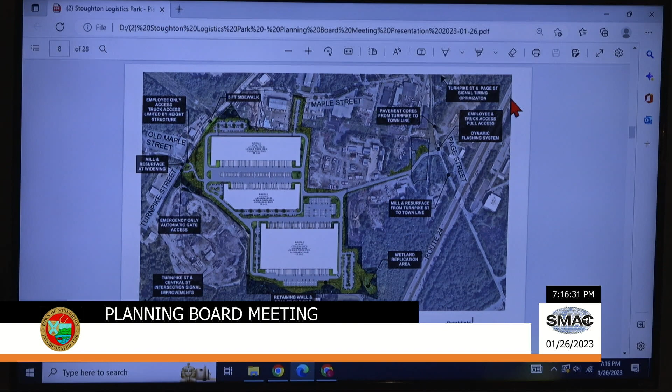This is our site plan, and we wanted to highlight some key areas as well as things that have changed since we were before you last. At the top of the page is Maple Street, Turnpike to your left, Page Street to your right, Route 24, and the IKEA site down to your south.

Starting at Turnpike Street to the left, we have our employee-only access, and the truck access is limited by a height structure. We're proposing to mill and resurface along Turnpike Street where we're widening, and also a 5-foot wide sidewalk that picks up where the current sidewalk ends, near the high voltage lines closer to Maple Street, continuing along our frontage on Turnpike Street and ending before the aggregate industry site.

In addition to the employee-only access, we have a separate emergency-only automatic gate access, which would be coordinated with emergency services to ensure they have access through the gate via fob or PIN code.

Then if we look towards the other side of the site on the Page Street side to your right, in terms of work that we've done in coordination with the traffic peer reviewer, as well as the town engineering department, we're going to touch on these in more detail a little bit later, but I'll give you a brief overview.

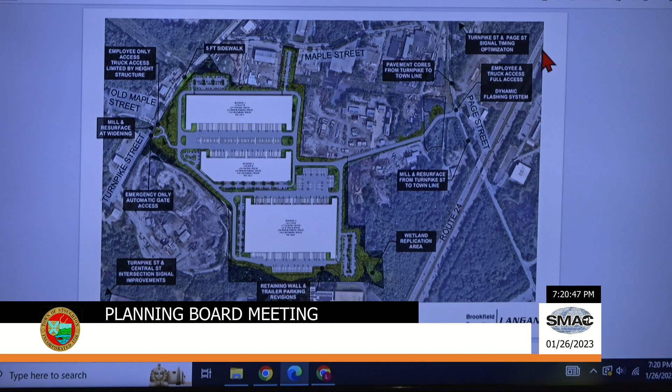Next slide. So there are a couple questions that came up at the last hearing when we were before you. One had to do with how much existing vegetation is on site, how much we're removing, and then how much are we proposing, because there is some clearing that we have to do on site in order to put in the development. So we took a closer look at that to provide the board with some numbers.

In terms of existing vegetation, we have on site around 11.6 acres, shown in the green shaded area. Areas where vegetation and trees are to be removed are shown in orange, around 4.8 acres. So 11.6 minus 4.8 leaves 6.8 acres of remaining existing vegetation. Layering in what we're proposing on site, where there's a quarry now with no vegetation, we're adding 11.7 acres. So 6.8 plus 11.7 gives a total vegetation for this site of 18.5 acres, a significant improvement compared to the existing vegetation out there. Our proposed vegetation will be native flowers and plants, also adding a considerable amount of trees.

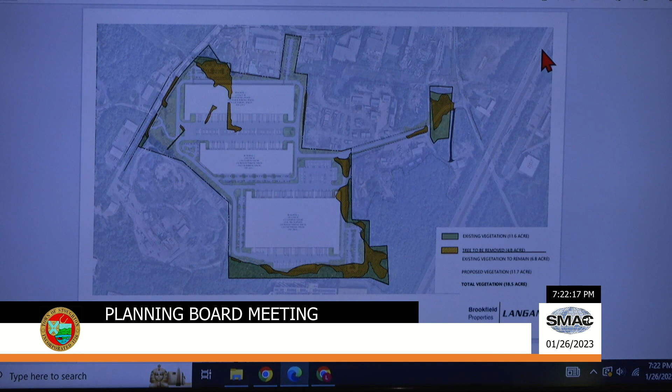Next slide. Sorry, Mr. Chair, through you, I think you have a question.

My question is, in your analysis of the existing vegetation and what you're proposing to install, have you done an analysis of broadleaf plants, large trees, maples, oaks, et cetera, versus conifers, which are native, and the net loss or gain of photosynthesis that your 18 acres will provide versus what exists now?

So we have not done any sort of greenhouse gas or photosynthesis analysis. We do have some inventory numbers in terms of deciduous versus conifers that we can look at and get back to you with more information on.

I think our goal is to certainly maintain and hopefully increase the photosynthesis, that's really the primary concern. Neither Hillary nor I can answer with specificity, but what I can tell you is that Sean and the others working on this are focused not just on quantity, but also quality, and one of the qualities is what kind of profile the particular selection of species has, and hopefully...

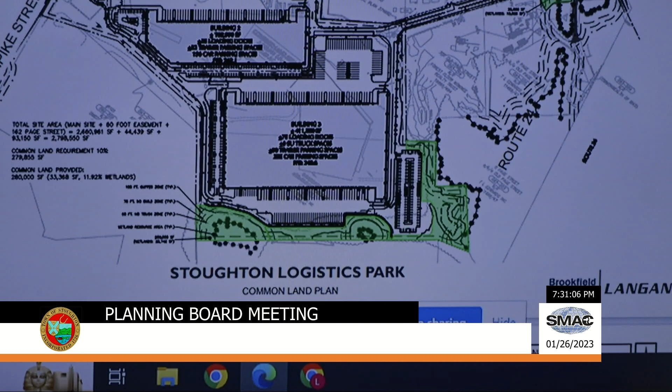Within the green space we're proposing to the south, we're really linking things. We have two isolated vegetated wetlands to the south, and we also have the wetland replication area to the southeast. Then to the east of our site, we have an existing bordering vegetated wetland.

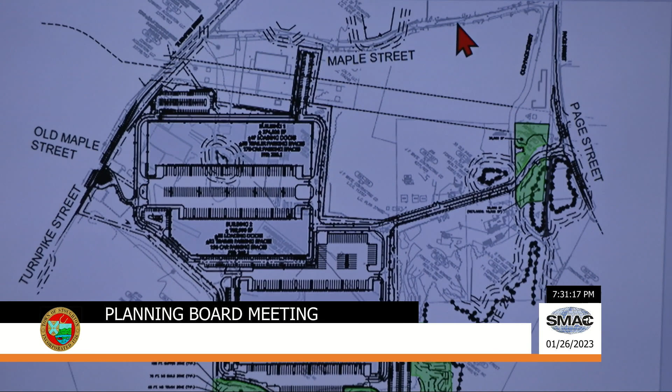So we're looking at taking that strip as common land to preserve it, which we think will be a nice conservation area, and also, speaking with the environmental affairs agent, provide nice habitat for amphibians and wildlife.

So this would be basically strictly conservation habitat land. But is it land you're looking to give to the town, or what's the long-term logistics of how that happens? Your bylaw allows a number of different things, and we're open.

I'm asking - I think our preference would be that we'd have an agreement with the town, but we'd continue to hold title. And the agreement would be? That we would maintain it in perpetuity. We would do it as a conservation restriction or other agreement with the town, whichever works for you. Right, correct? Yeah.

Go ahead. Okay, so I'm going to hand it off to Maximo, who will go over some of our traffic slides and some of the work we've been doing since we last met with you. Thanks, Hillary. Yeah, that's fine.

Good afternoon, Maximo Polanco with Langan Engineering, the traffic engineer who has been working on the development. Mike, if you can go to the next slide. So before we get into the slides, a brief update of what has happened since our last meeting.

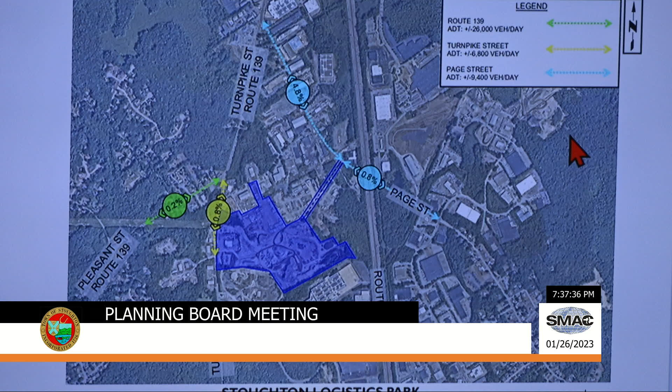If you can go to the next slide, Mark, please. Talking about what we call our largest improvement.

As previously said by Hillary, we've agreed to mill and overlay from Town Line all the way to Turnpike. In addition, at our proposed main entrance, we're going to widen the road to provide a southbound right turn lane, for people coming in from the north.

I'm going to interrupt you for a second—I know the site really well, and it's taking me a little while to get oriented here. Yeah, so orient them with Page and things.

So basically, Page is on this side, which will be the north. And then this will be the south, basically this side. So the Town Line, or Avon, is to the right, and then Page is to the left.

And Page Street, is that up to the traffic light at Turnpike? Yes, yes. So basically, we're going to mill and overlay all the way from Town Line, which is basically after the underpass, all the way to Turnpike.

If you're coming from Page Street, you have a dedicated right turn lane to get into the site. That way there's no queue or blocking for people coming from the north. We expect that most people will come from the north, as that's the most direct access to Route 24, and most trucks are likely to come from that area.

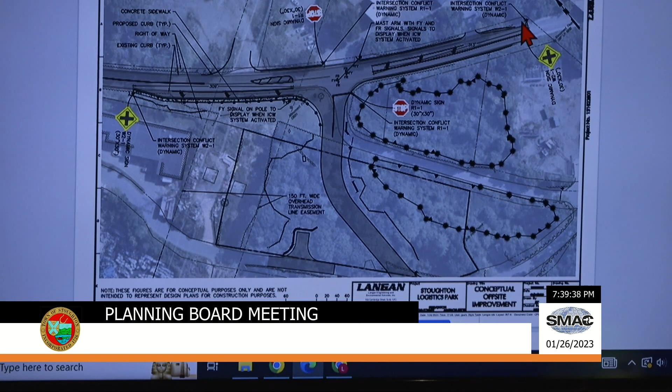In addition, just a couple of days ago we agreed to install a dynamic flashing signal. The main reason we're proposing a dynamic signal instead of a full traffic signal is because the volumes do not warrant it, there is some liability, and engineering judgment tells us a full signal is not feasible at this location.

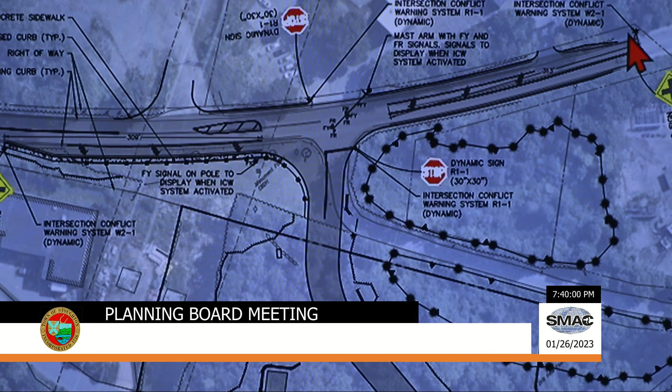So basically, this flashing dynamic signal will activate once a vehicle tries to exit not only our driveway, but also the driveway on the other side from us, the Buck side, I think it's called, I forget the name right now. Basically it will activate the mast arm, which you can't quite see right now.

If you can zoom in a little bit there, Mark, sorry. The mast arm that has the signal will start flashing yellow for Page Street and will flash red on our driveways, basically providing a warning to people traveling on Page Street to slow down.

In addition, the signage we have in yellow, before and after the intersection, will also flash. That will tell drivers that there is a truck or vehicle exiting those driveways, and that will warn them.

Allowing people to slow down will provide a proper, safer gap for trucks to get out and not cause an accident. So basically it'll provide full safe access to the site, and not only our site, but our neighbors are going to benefit from that as well.

So that is, in a nutshell, the improvements we're providing at this intersection. I should say the stop signs as well are going to be dynamic, so they will start flashing, not only the lights on the mast arm, but all the signs shown here will flash yellow as well. This is a concept we wanted to show to ensure our commitment to providing an improvement like this, and I think it's pretty good.

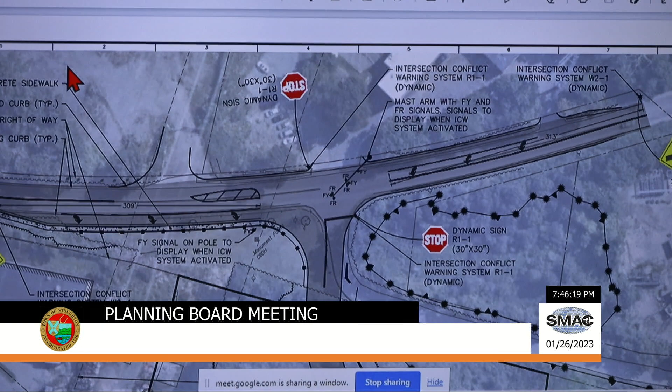Okay, you mean basically there was a plan for sidewalks, but they're on the wrong side, and we're trying to figure out how to make it continuous going down Page Street. But right now it's very discontinuous, so we're trying to make it work. That's right, yeah, correct. Thank you. That has been discussed a lot.

Just as an open thing, there have been various meetings with the traffic consultants, our traffic consultants, and the town employees, Mark and Craig. I've been involved in those, listening in and asking questions, so just so you all know, I have been following along with those meetings as part of our review of what's going on, so just to be clear and open, I have been there trying to discuss that.

And that's why I'm trying to bring up the stuff that has already been discussed. Go on. So if we can go to the next slide, Mark, we'd like to show basically the improvements we're doing on Page Street and on Turnpike Street, which we are also widening to provide a left turn lane.

If you see here, Pleasant Street is to the right and Central Street or IKEA Way is to the left. We're widening that segment all the way from the south to the north to provide a left turn lane and safe access for everybody expected to come from the north, mostly employees, since this is just vehicular access.

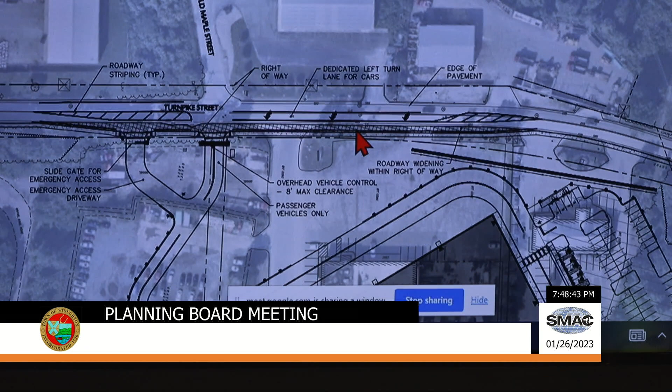Then I would like to go into more of the off-site improvements we're proposing. One of the major off-site improvements, if you go to the next slide, is when we analyze the intersection of Page Street and Central Street and how that intersection is operating and how we can make it better.

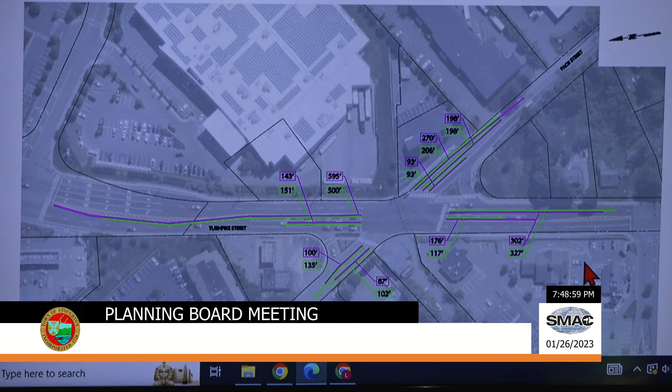We discussed this in a couple of meetings, and we will propose some signal optimization. Basically, it's evaluating the existing conditions and expected traffic, and what we can do in terms of traffic operations and how the signal is operating to mitigate the intersection, reducing the queues and overall delay so the intersection can operate with better traffic flow and seamlessly.

What you see here in magenta are the expected queues in 2027 without our development. Our proposed optimization changes the signal operation, basically balancing the green times at each approach, so the heavier approaches, in this case Turnpike Street, will get more green time than Page Street, as well as reducing the queues overall.

So the largest queue, as you see here—pull it up a little bit, the numbers are difficult to see—to orient us, Page Street is to the right, and the entrance of Target is to the left.

In 2027, which is our horizon year, the southbound left turn queues are expected to extend over to the Target, and with our proposed optimization that will get reduced, basically by about 100 feet as shown there, from 595 to 500, as well as the other queues, specifically on Page Street.

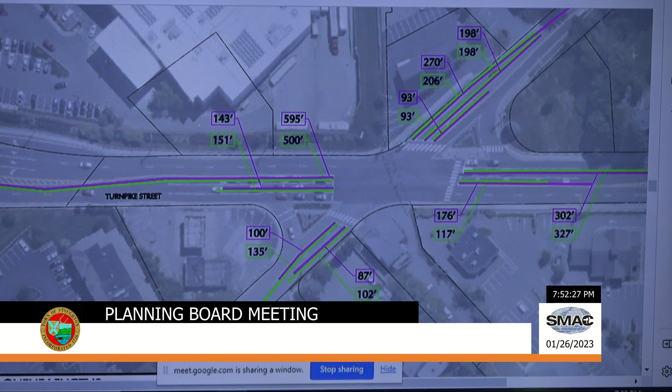Right, the southbound left-hand turn. You're using both lanes coming into Page Street as turning lanes, but there's only a single lane in Page Street at that point in time. That's why if you see the queue, it gets extended all the way back. I see it, yeah, it goes all the way to the top.

That's why we wanted to show the queues at the left turn and right turn movements, but also the queue to the south, which is basically the 2 through lanes, expected to be 143 and 151. So within the existing storage for the through lanes, the left turn lanes won't block it. Even with trucks lined up and backing up, that 1 lane will be available for people going through and they'll be distributed into the through lanes, not used as a turning lane.

Correct. Okay, I misunderstood it, I thought you were saying that was a turning lane. No.

So this is the proposed condition for the morning.

You said you were going to widen Turnpike Street? Yes, on our driveway. Do both sides, or just one side? On our driveway, it's going to be on our side, because that's where we have control of most of the right-of-way.

Well, there's a drain tile in that gutter line that stretches from your driveway all the way up past where Simeon's plant used to be, because that area is prone to flooding.

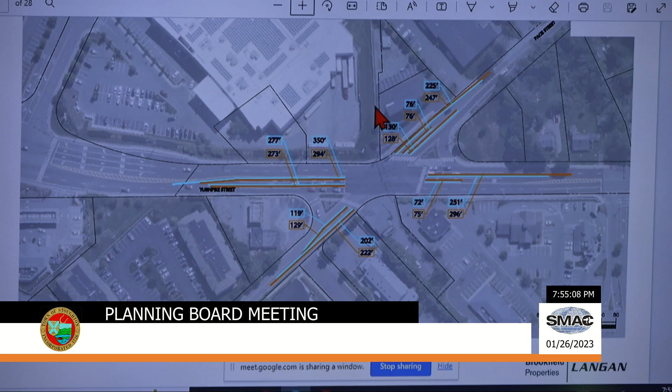Next slide. Same thing here for the next slide, this is the morning, and the other slide is the afternoon. So that's our mitigation package to mitigate the impacts to Page and Turnpike Street. Everything in blue is the existing or future queues without our development, and everything in orange is our queues with the development, showing we are reducing the queues overall at all of the major approaches.

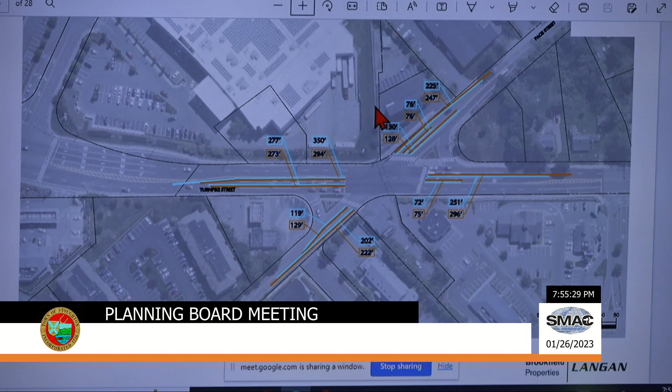So when Central Street is green, everybody's green, even the left turns. People wanting to turn left to go north or south have to find a gap or force themselves into those roads, which causes an angle crash. Our analysis shows that 75% of the crashes here are due to that condition.

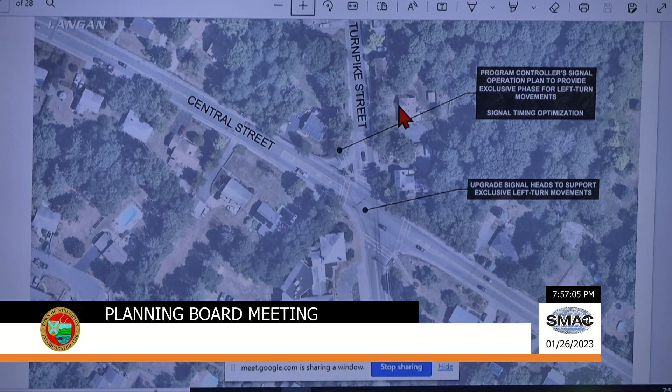So we have agreed to upgrade the signal heads to provide an exclusive left turn lane phase that will stop everybody and give green time just for the left turns, so they are not competing with through traffic to get in. We'll also reprogram the intersection controller with new signal timing to make sure that operation can be handled safely.

That's in both directions on Turnpike Street? Both directions, yeah.

And with that, that finalizes our mitigation package. So if you have any questions.

I'd like to bring up one of the things that was brought up at our last meeting, and I've talked to you several times about, which is the traffic pattern. I've had an issue with the traffic pattern as far as everything going in and out of Page Street.

One of the things we discussed at one point was to bring up, and this intersection is a good photo of it, having traffic come off of 24 at Harrison or Central Street, then come up and either go into the project or leave through this intersection. Going through the analysis you've done and through several meetings, due to the condition of this intersection, I believe, and speaking to our own traffic consultant, the safety issues here would probably outweigh the safety issues of bringing everything out onto Page Street. So my concern has always been the safety in and out of Page Street.

Your mitigation with the lights and what you've done at that intersection of Page Street, I'm much more in agreement with than I was originally. I would still like to see the traffic this way, but if this has the crash data and other issues being brought up by our own consultants, I think that in my own mind mitigates it. But I do want to bring this up with the board, because it was something we had talked about, and I'm not sure if it's still in the board's mind or if somebody else wants to bring it up.

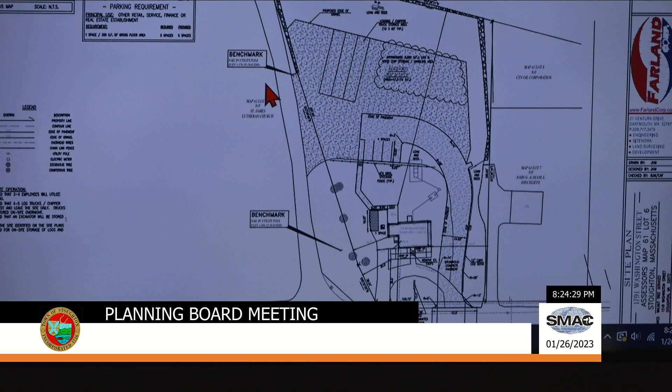So not really sure what utility would be gained by fencing the site, because I'm not sure who is going to be seeing anything. The fencing to the front to screen the operation from view from the street was a condition of approval in the zoning board special permit, so we are providing that. But in terms of fencing the entire perimeter of the site, I don't know that any benefit would be gained from doing that.

Except it has been an ongoing part of our plan review and what we expect to have for all commercial sites. I don't know why we would change that at this point in time, but it's something you're asking for that's beyond, outside of our design parameters.

Yeah, I just think the nature of the site and the particular abutters—every site kind of stands on its own, and in this particular site I just don't see that. No, but you do have a residential site right next door to you. I understand, yep. We've met with the Hinchcliffes, and again, I don't want to speak for them. They can address any concerns they may have. Okay, we'll look into that when they get there.

Mark? Thank you. Mr. Crimmins is correct, all the technical review comments have been satisfactorily addressed. Craig had 20-some-odd comments, most of them were stormwater-related, things of that nature.

They have been addressed. I was going to mention the ZBA condition about the fence screening the use from the road. He already did—they've added that fence, that stockade fence, on the plans. There is a waiver from the developmental impact statement. What type of fence did they provide there? 6-foot stockade fence, right, wood stockade fence? Vinyl, I think vinyl PVC, white proposed PVC.

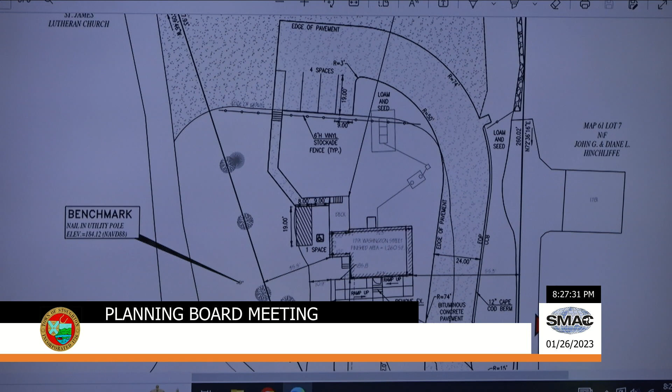And then the last remaining issue, as you know Dan, is the encroachment issue for the driveway on the abutting property. Craig had a comment in his letter that the board needs to review and address it. To try to help out the issue, I was kind of unsure how that should be addressed, so I reached out to town counsel to get their opinion on a driveway encroachment on our project. Speaking with town counsel, it was his opinion—again, it is an opinion—but our town's counsel said if the driveway on the abutting property does not impact our use or our access to our use or our project, and is not a physical structure like a building, then it's not something this board needs to resolve.

It's really a private issue amongst two civil property owners.

So under site plan review, that was his recommendation. For example, if the driveway was combining with our driveway and we're combining access, it would impact our project. That'd be a different situation. But again, that's up to your board to decide. That was the input I got from our town counsel, and that was kind of the last remaining issue that your board probably should discuss, in my opinion.

So, at the last meeting, we had asked that you meet with the owners and try to come up with a solution and/or an easement to that driveway. Has that been done, or where are you with that at this point?

So I spoke to the owner. Again, my client is a tenant at this site, not the owner of the property. The owner, Mr. Goulston, was not inclined to grant an easement to the Hinchcliffes. He's aware of the situation. It's a situation that's been allowed to exist. He has no issue with it. Creating an easement raises a whole host of other legal issues between the parties that, quite frankly, he does not want to get involved with.

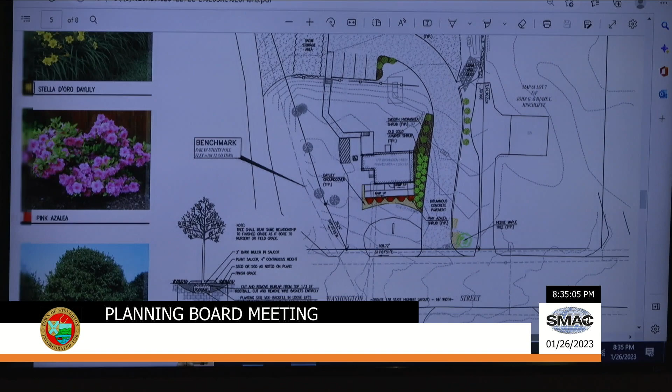What size are the trees that's along your neighbor's driveway? What size are those, just bushes, or those trees that you got coming up? You got five, between the driveways, I believe those are bushes. You have five plants depicted there. I just can't see in the drawing what they are. Yeah, those are hydrangeas. So they're just small plants. Yeah, we have one tree proposed, that's the maple up front.

Then we have the row of cypress along... excuse me, there's a row of proposed cypress along the top of that wall. Right there, yeah.

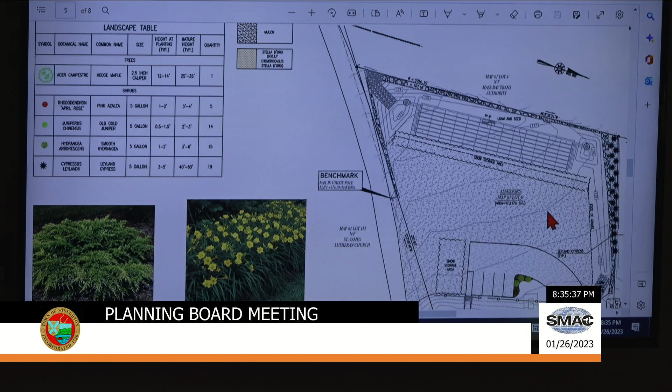Anybody else on the board? The neighbors have no issue, no harm, no foul, but if they go to sell their house, is that going to create any kind of an issue? Well, we're not creating an easement, we're saying that, or basically, we're saying it exists.

Again, I have a different opinion than the attorneys do, so I can only say what's on the drawings, what's been the previous history of what we've done with the planning board, is when there's an encroachment, is to repair the encroachment. Right now, they don't have an issue, and the neighbors don't have an issue. And there's a long-standing encroachment that they could claim on. So at this point in time, the attorney's opinion to the town is kind of where it's stating right now.

So as far as the protection of the neighbors, I agree. There should be, we've talked about it before, about protecting residential properties. We actually have a couple of projects in front of us right now about putting up fencing and other protection that's being required by the building department and other departments, just for this factor of having commercial properties adjacent to residential properties, for what we could have concerns about safety issues down the road.

If we did end up requiring to put a fence, that's going to end up blocking off her driveway. I mean, they could bring the fence and bring it around, but it will create something that the neighbor isn't looking for, but again, we're looking long-term as far as what that goes. That's just, again, I'm just one person speaking of the board. I agree with your assertion, but also trying to take into account what the neighbors actually want and what's actually being given in that area, so I am trying to take that into account also.

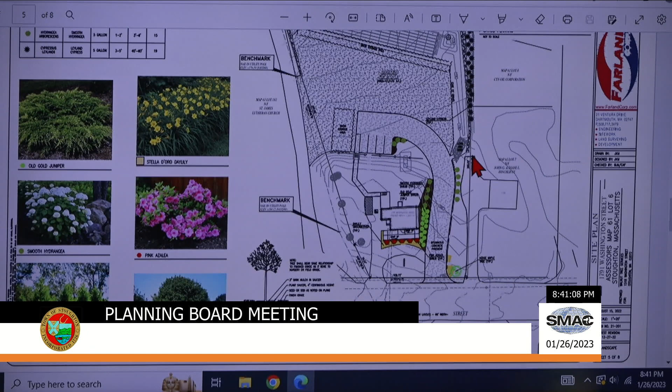Do we have a plan that shows her property—the plot size of her property? That one there, okay. So right now, you have a fence running along your back property line, up along where the trees are on the south side. And then where does the fence stop? Right there where the driveway ends? Right where the curve of the driveway is, across from the steps that go up into our backyard, that's completely fenced in. So the fence actually touches our house. Yep, goes all the way to the back of our property, and it's completely fenced in.

So that wall—there is a stone wall there, and they've added some trees there for us—the fence is right there. Well, the backyard is completely fenced. Completely. The front yard and that whole area is just completely open. Well, yes, the front yard is open. But across the front of our house, over towards where Sin Environmental is, we do have fencing there that squares off our property. So there is chain link down the right side and across the back that was existing from Sin Environmental.

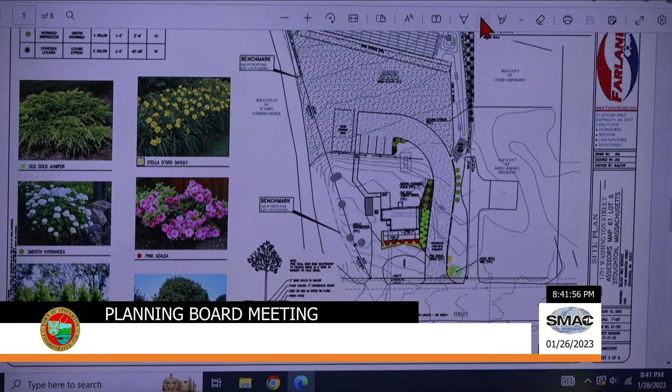I think our consensus is that commercial properties should be fenced in, and with this driveway issue, there should be some type of solution for how you put a fence from that part of their driveway down to the front, so that there's no possible people moving in and out of that area. It is quite a simple solution. But you're saying you don't believe we need to have a 6-foot high or even a...

No, even like you do a 4-foot chain link fence running along your property line, giving on the other side of the driveway, so they continue to have the driveway.

Can I say one thing? The reason I don't want the fence is mainly because on one side of the house where our driveway comes up, we have bushes. In the winter, when it's time to snow blow, I'd be able to snow blow into the Moore's yard. I've already talked to Mike, I snow blow into there, he pushes it all back into the woods. If we put a fence there, or bushes there, it's not gonna work. I have nowhere to throw my snow.

But the town has a thing about commercial properties being fenced in. It's not part of the bylaw, it's part of our design standards and what we normally do. But we've made exceptions in the past on different types of site plan reviews, and this one has its own issues.

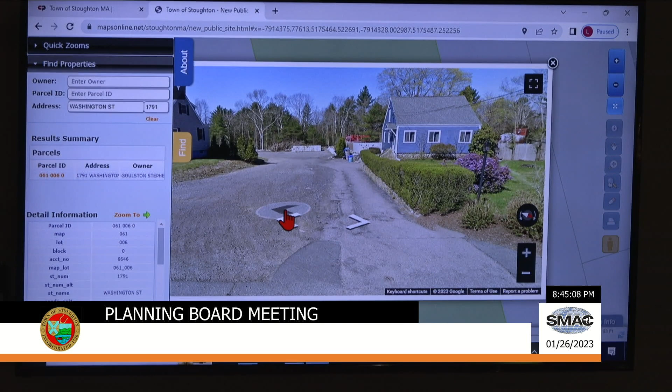Can you try to line it up, like presently, right opposite the driveway access area? Yeah, right about there, that's good. That area is gonna change at this point in time, because you're gonna have a grassed area between their driveway and where the plan looks to me, anyway. There's going to be a grassed area between that driveway and where the access driveway for their new access driveway is gonna be, am I right, correct? And some rhododendrons. You're ripping up a whole bunch of asphalt there, you're tearing that out, and you're creating a grassed-in area.

So what we're trying to say is it's gonna look differently than it looks now. Presently, there's going to be a grassed area, so you're concerned about snow blowing into their driveway. You'll be snow blowing into a grassed area, you'll never make their driveway. In the future, the way it's gonna be set up, except for the area down by where your cars are gonna be coming in and out. But even that shows an area of plantings at the end of the driveway. Right, it's just a small area of plantings, right?

I mean, it's quite different the way it is right there as opposed to how it's going to be designed. Right, because if you go back to the plan, there's going to be an area of grass, and I think what Paul was trying to say is that if we put a fence down that area of grass, it doesn't necessarily have to be on the property line, but just some 4-foot fence, just for a safety issue. And that was his only concern. Right now, it's being used in what type of fashion? Just the same trucks going in and out that are there presently? Right.

You can kind of see the different coloration where the Hinchcliff's driveway, immediately to the left of their row of shrubbery, is what they use to get to the property. To the left of that, where the arrow is, is the area that we will be using to access the rear of the property. To the left of that again, Barry, there's an area of grassed-in land. That's all I'm trying to say. So what Paul was trying to say, in that grassed-in area, wouldn't it just be prudent to put something along that line for truck access? I understand the way you live right now, it's fine, but we're looking at what's happening 10 years from now, when owners change.